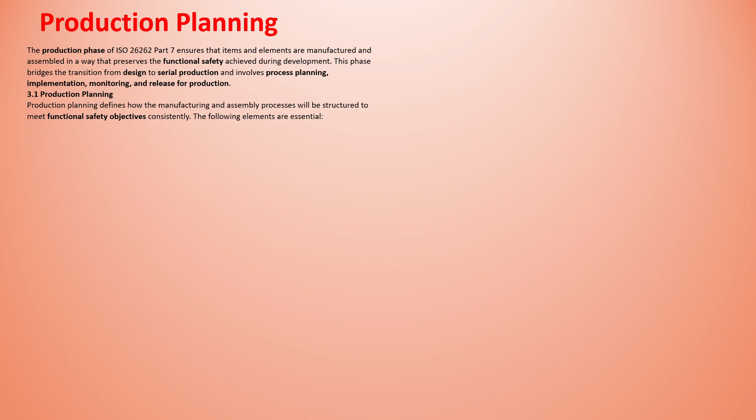A big piece of this puzzle involves process capability and control plans. Basically, you need proof that your manufacturing processes can consistently hit the targets for what we call safety-related special characteristics, or SRSCs. Think about the exact torque on a critical bolt, or the precise voltage calibration for a sensor. We use statistical methods like capability studies, Cpk maybe, to show the process is stable and capable. And it's not just machines. People need regular audits too. Then the control plan details everything: inspection methods, how verification happens, the pass-fail criteria, what to do if something's wrong, and it's all scaled to the ASIL.

Stricter controls, right? Like way more checks. Exactly. More stringent controls, more frequent checks, tighter tolerances. It's absolutely ASIL appropriate. It's kind of like building a simple garden shed versus constructing a skyscraper, maybe. The skyscraper demands obsessive attention to every weld, every bolt, every single step. That's a good analogy. And just like with that skyscraper, you need records.

That brings us to traceability of production data. Every safety-related item or element needs a unique ID. Could be a part number, serial number, batch number, even tied to the VIN. And this traceability needs to link back to how it was made, the production parameters, test results like from end-of-line testing, calibration data, and its exact configuration, like the specific software and hardware version.

Wow. Okay. So theoretically, you could trace a specific sensor in my car right back to the machine that calibrated it and the software version it was running when it left the factory. That's intense. It is intense. And that level of detail is crucial if something ever does go wrong later.

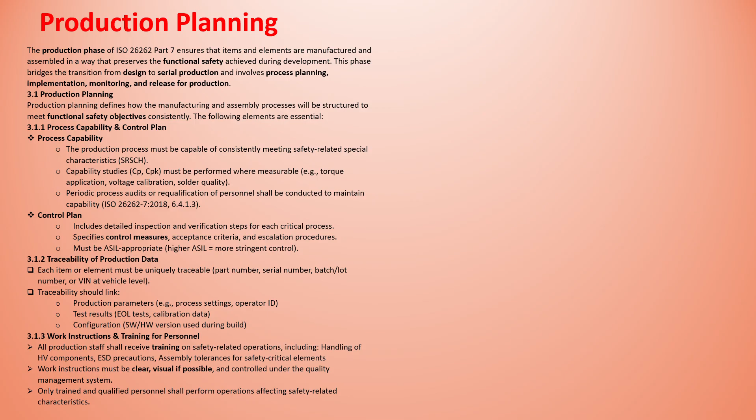Okay, so trained people, clear instructions, traceability. What else? How do you check it all came together, right? Right, that's verification of correct item integration. Checking that the right hardware is talking to the right software, components are installed correctly, torque's right, alignment's right. Any slip up here has to be caught and fixed before the car moves on. Which leads naturally to end-of-line, EOL, testing. This is mandatory for ASIL items.

It is the final check to confirm everything works as intended: safety mechanisms function, calibration is correct, it communicates properly on the vehicle network, and guess what? The results get stored and linked to that traceable ID. You got it. All stored and linked.

And sometimes, especially for really high ASIL stuff like ASIL D, you might even do fault injection testing. It's usually optional, but recommended. Right. You basically deliberately introduce, simulate a sensor failure to make sure the safety mechanism kicks in correctly, like the ECU going into a safe state.

Okay, let's just unpack that for a second. The level of detail here is incredible. From a tiny solder joint specification to tracking software versions, to deliberately breaking things just to test the fix, all so you can trust the car you drive off the lot. It's a hidden world of safety engineering.

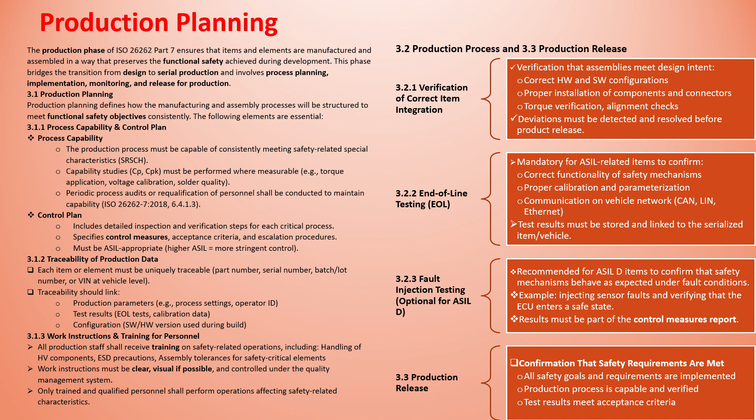It truly is. Now let's shift gears. The car is off the lot. It's built safely, tested thoroughly, and now it's out there, maybe even in your driveway. What happens next? This is the operation phase. The goal here is to keep it safe during its intended use, spot any systematic problems that maybe didn't show up in testing, and make sure any updates or changes in the field don't break the safety. It's like the car enters this continuous monitoring state.

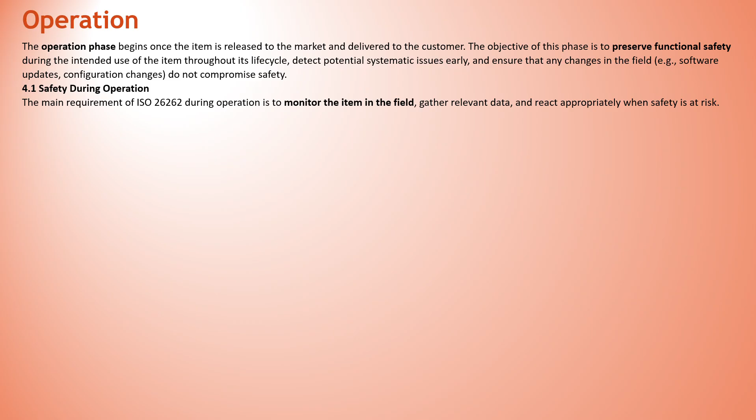We need monitoring of field incidents and failures. We're actively looking for new hazards or maybe failure modes we didn't anticipate. How? By collecting and reviewing reports from dealerships, maybe customer complaints, warranty claims data. We also track diagnostic trouble codes, those DTCs that pop up during service. And we look at parts that get returned, especially if they're marked no trouble found. That can be a clue. If something looks serious, especially if it's safety related, it triggers a root cause analysis and gets escalated.

So the car is constantly feeding data back in a way, even just through warranty claims and service visits. What kind of data specifically helps update the safety picture? Yeah, it's a constant flow. We rely on collection of operational data. Sources include warranty claims, service logs, those DTCs, customer feedback directly, and increasingly, telematics data streamed from the vehicle itself.

And we don't just collect it, we analyze it, looking for trends, comparing actual field failure rates to what we predicted in the safety analysis, like the FMEDA. If reality differs significantly, we might need to update the risk assessment.

This also helps with field monitoring for systematic failures. These are the tricky ones. Latent software bugs that only show up under rare conditions, or hardware aging effects like tiny cracks in solder joints or sensor drift over time. Field return analysis and setting up early warning systems help catch these.

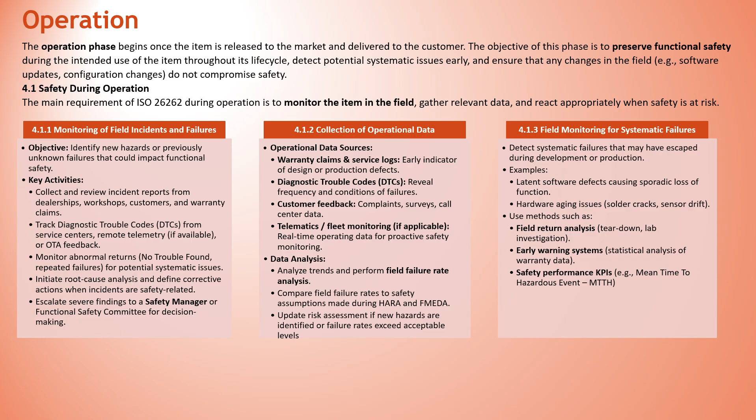Okay, that makes sense for catching problems. But what about helping the driver use the car safely in the first place and keeping them informed? Absolutely critical. That falls under customer information. Manufacturers have to provide clear, easy to understand operating instructions. Think user manuals, quick guides, labels right there on the vehicle.

This covers everything from how to plug in your EV charger correctly to maintenance schedules to what to do in an emergency. And just as important are the warnings and limitations for safety systems. You see them all the time. Driver assistance is not a substitute for driver attention, or maybe temperature limits for charging. These are mandatory for ASIL-related functions, often using standardized symbols, to manage any remaining risk. Right, the fine print. That's actually really important fine print.

What about changes after the car is sold, like software updates? That seems like a big area for potential issues. Well, it's huge and heavily regulated within Part 7. That's field updates. Whether it's an over-the-air OTA update or one done at the workshop, the implementation has to be safe. That means secure flashing mechanisms, authentication, signature verification to prevent malicious code, making sure the correct version is installed, and doing a post-update verification, like a quick system check or checksum validation.

And here's a really crucial bit. There must be a rollback strategy. A plan B to revert to the last known good, safe software version if the update fails or causes problems. Safety net for the software.

Makes sense. Exactly. And tied closely to that is configuration management in the field. You need a database that tracks everything for each specific vehicle, by VIN usually: which ECUs it has, their part numbers, the exact software versions, calibration settings, and a history of all updates applied.

This ensures only approved, tested configurations are actually running in the car, and every single change is documented following the rules in ISO 26262 Part 8, which covers supporting processes like configuration management. What's really fascinating here is how the vehicle and the whole ecosystem around it keeps learning and adapting its safety profile. It's not static. It evolves based on real-world data and controlled updates.

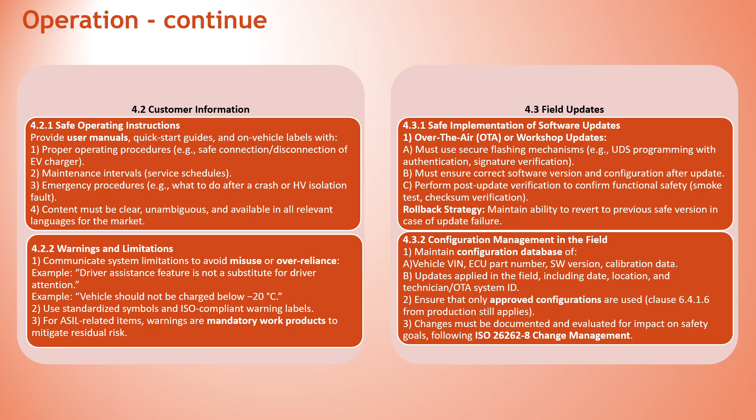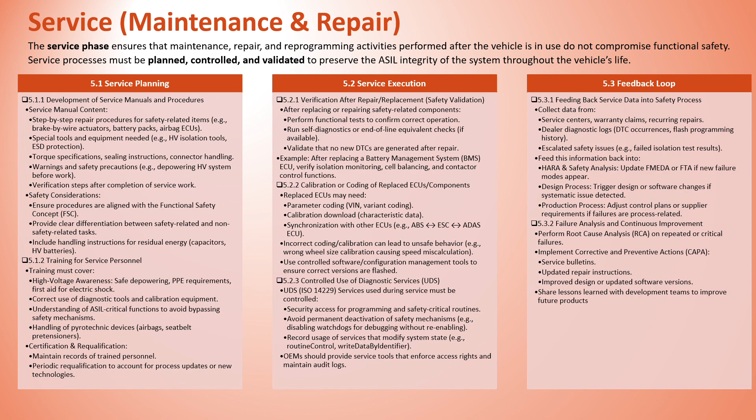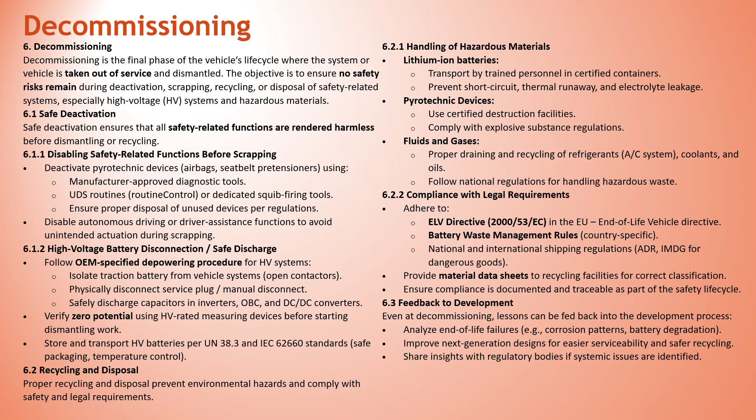It really drives home that holistic view, doesn't it? Safety isn't just a design feature you check off a list. It's this living, breathing aspect of the vehicle's entire existence, managed from cradle to grave or maybe drawing board to junkyard. It's quite an undertaking when you think about it. So we've journeyed through ISO 26262 Part 7: production, operation, service, even decommissioning. It's amazing how many critical processes are working, often silently, behind the scenes to protect you every single day you interact with your vehicle. It's a huge testament to the engineering discipline involved.

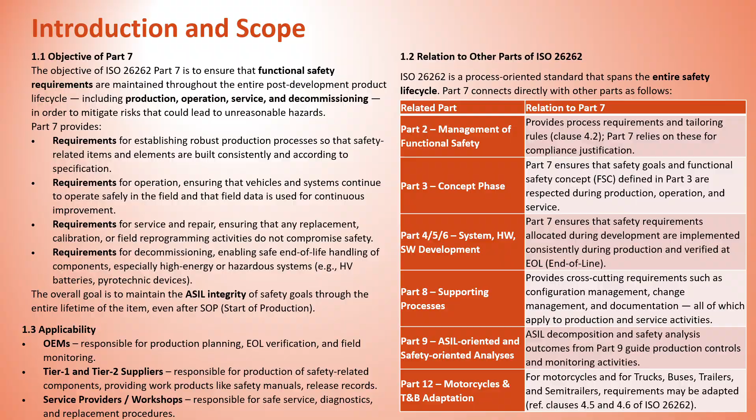Absolutely. And reflecting on all this, it really raises a provocative thought for the future, doesn't it? Yeah. As vehicles get exponentially more complex, more connected, more automated, maybe even fully autonomous, what new challenges will emerge for operational safety, for service, for end of life? What new dimensions will we need to consider? And how will standards like ISO 26262 need to keep evolving to address them? That is a great question to leave our listeners with, something to definitely ponder as the technology races ahead.